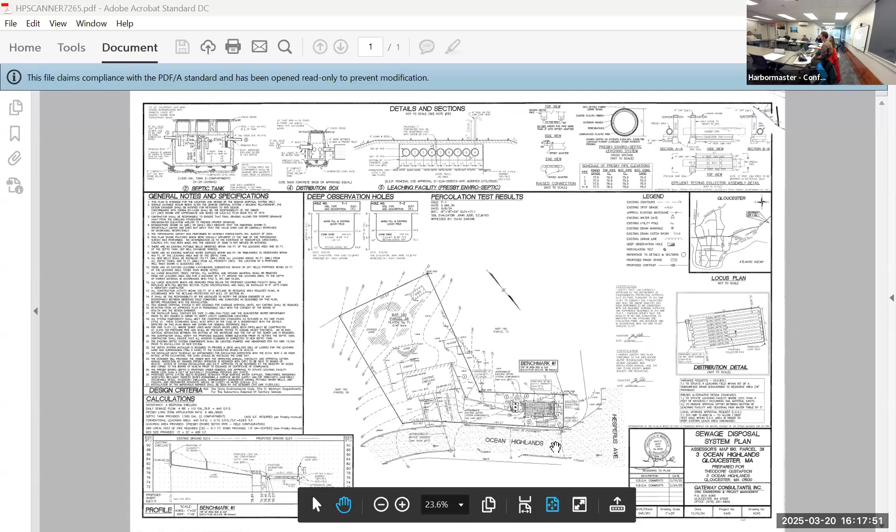That's it. Okay, we'll move on to the first item on the agenda, which is 3 Ocean Highlands relief requests for a septic repair. Tyler, feel free to take it away. All right, my name is Tyler Judd. I'm an engineer with Gateway Consultants representing this project at 3 Ocean Highlands. It's my understanding that John presented this project a couple weeks ago to you, and I believe you're all familiar with the proposed system already.

So it's my understanding that you guys wanted us to add a variance for the drain that's 18 feet away from the proposed field, which we've added to this revised plan here, and updated the variance form and notified abutters. So those are the only changes that we've made since the last meeting. So yeah, that's a pretty brief summary, but if you have any questions, please ask.

All right, and then just to summarize, just for the record, for 3 Ocean Highlands. They're asking for 1 Gloucester variance to a subsurface drain, where they're 18 feet away when they're supposed to be 50 feet away. They've provided an impermeable barrier around the system to make sure that the groundwater will be directed downward and not laterally. So in the event of a breakout, there should not be lateral movement of effluent towards that drain.

They are also asking for 2 alternative design standards with their Presby system. The first one is to reduce the depth of groundwater from 4 feet to 2 feet. That allows for a gravity system in this case, and also helps with grading on the site. And the system is approved for that. The other alternative design standard is that they're asking for relief for 4 feet of naturally occurring soil. They provided 34 inches of soil. So the system is approved for that reduction.

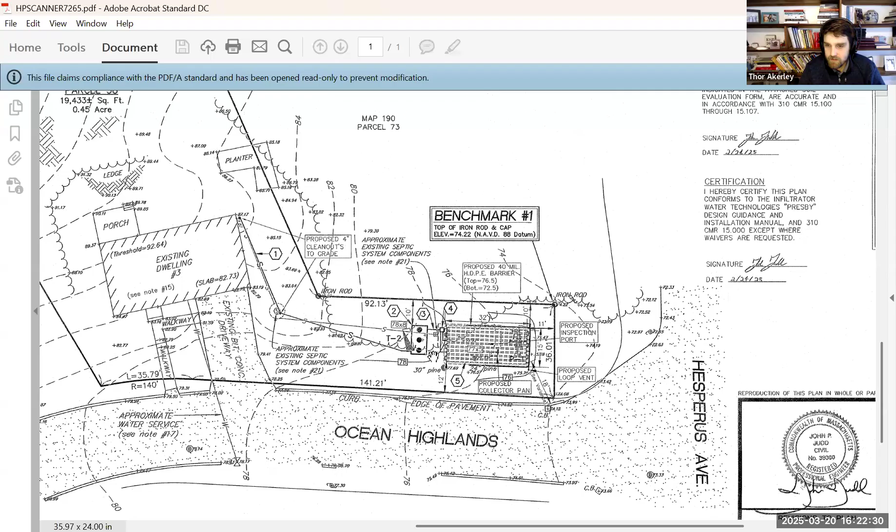Thanks. Okay, and then next up we have 35 Presson Point Road. Again, relief requests from designer John Judd from Gateway Consultants. Tyler, feel free to take this one away. Good, 1 second. All right, hello everyone. I can bring it up for you too, but you can start. Sure. Tyler Judd, engineer with Gateway Consultants, representing this project here at 35 Presson Point.

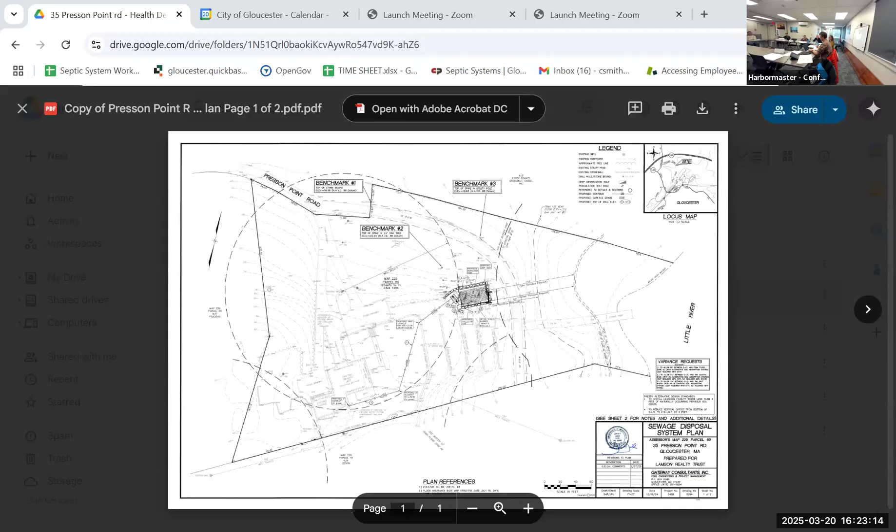So the existing system, I'll wait for Cody to pull up the plan. So the existing system is directly behind the existing dwelling. Yeah, if you want to zoom in, right over there is the existing system. It's about 10-15 feet away from the existing house, if that. And the owner would like to put in a new system that meets all Title V standards, well, most Title V standards, except for the alternative design standards that we're asking for.

Due to all the setbacks from the well, from the elevation 13 FEMA flood zone and the coastal bank, we were limited to a small area to situate a leaching field. And when we were digging in that area, we weren't able to get the 4 feet. We could only get to about 2 feet plus, and so that's why we have to request these alternative design standards with the Presby system. It's a gravity system that feeds into a D-box that goes directly into the Presby system that you see on the plan.

So yeah, we're asking for a few variances to allow the soil absorption system 65 feet away from the FEMA flood zone, to allow 112 feet between the soil absorption system and the coastal bank, and to allow 114 feet between the leaching field and the salt marsh. Gloucester requires 200 feet, where Title V requires only 100 for these areas, so those are our variance requests.

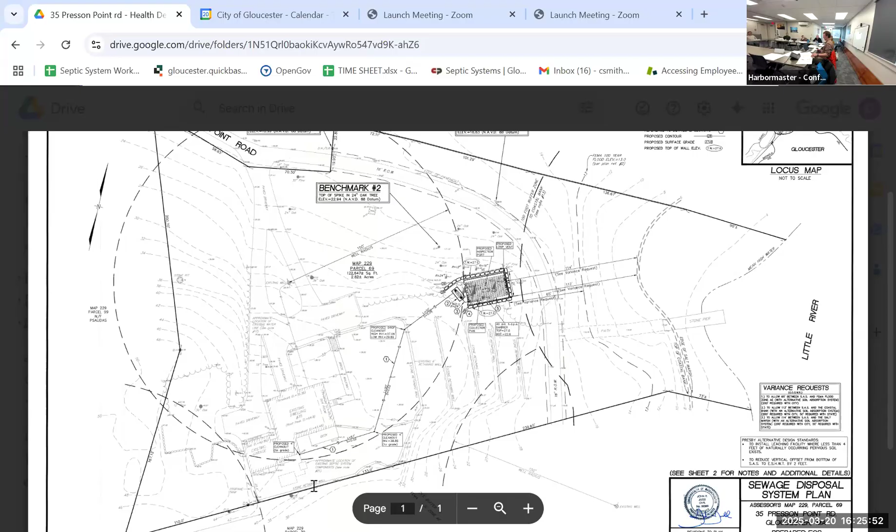And so I'll just kind of fill back in. So I think Tyler covered the 3 variances that he's asking for and the 2 alternative design standards. A question that I didn't ask that came up the other day is, I'm not quite sure, and maybe Tyler can elaborate after I'm done, why we didn't necessarily propose putting the system kind of at the top of the hill. I think initially when we were out there, it might have been talked about just the constructability basically being up in that corner, but I think it'd be good to elaborate on why you positioned the system there as opposed to the other spot potentially.

The system is approved for both alternative design standards. They are providing a pan lysimeter for testing on the first leg of the system that will require basically quarterly testing for the system to make sure that it's working. I know sometimes the board doesn't like patented sand filters as close to a wetland area or our coastal resource areas. They are approved under the same stringent protocols as the secondary treatment units, although they haven't necessarily been tested as long.

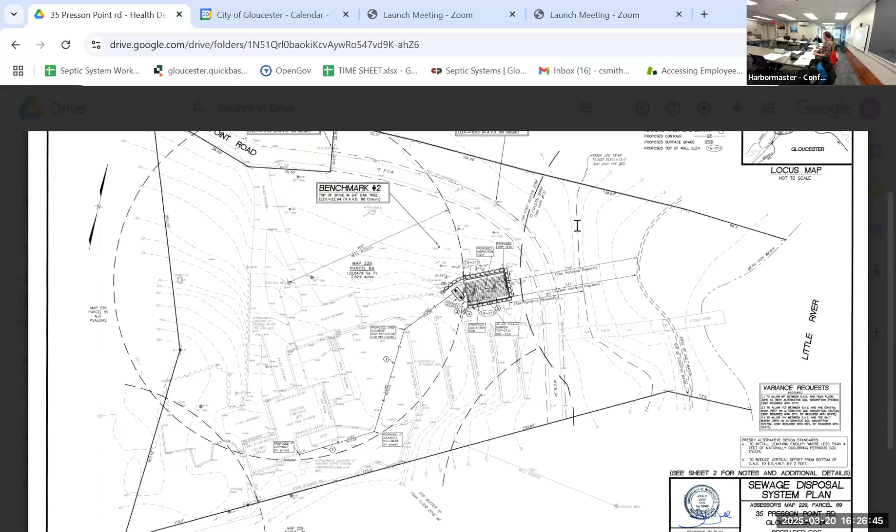In regards to the flood zone, it is a FEMA flood zone of 13. And so if we look at the vertical component here, the top of the system is at 27, so it's well out of the flood zone itself. So it does have good vertical relief from the flood zone. And from the salt marsh and such, they are kind of limited basically to either constructing in that far back corner, or in this kind of location here, unless they do a well setback.

They do have an impermeable barrier where there's limited soils, so the liquid will be directed downward. You're looking at about 5 feet of sand on the far end of the field. So even though they're looking for a reduction to 2 feet, they'll have plenty of sand above it. So that'll kind of aid in the filtration effect. Sand isn't a great treatment media, but it is a good clarifier.

The soils are loamy sand, I believe, or sandy loam. In either case, both sandy loams and loamy sands are better filtrators of nitrogen and BOD and TSS as it goes through, because of that silt content being electrically charged. So if this system was out on a sandy beach, I wouldn't necessarily recommend it in this scenario. It's my opinion that the system meets the requirements set forth by the state. And yeah, so my only question to Tyler is what the reasoning was for not putting it up in the original location.

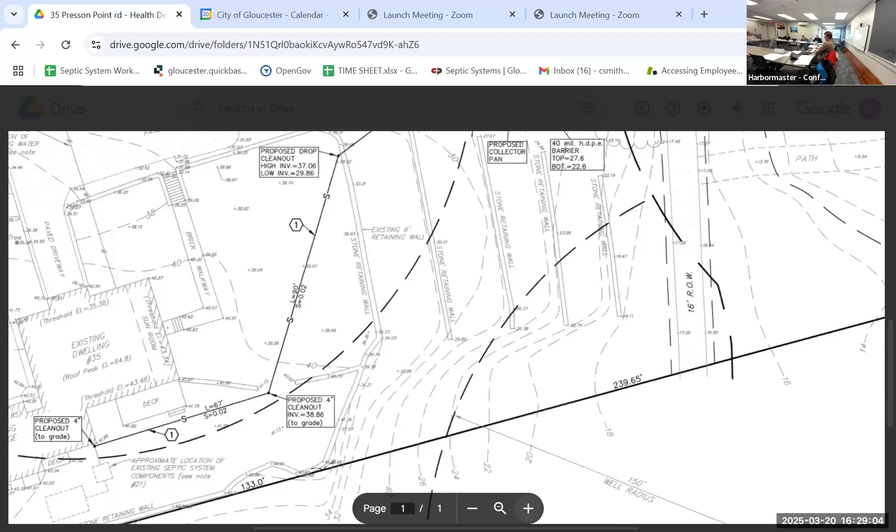It's all ledge and fill. Where the existing system is? Yeah, that whole area was kind of raised up. Okay. So if we dug over there, I know for a fact we'd get ledge less than 2 feet away. I could show you on the screen, but yeah. Beyond that retaining wall, it's all ledge, and then up there, it's gonna be. This whole area was terraced at one point. Yeah, so that's why we didn't even bother looking over there, because it's not good soil and it's ledge.

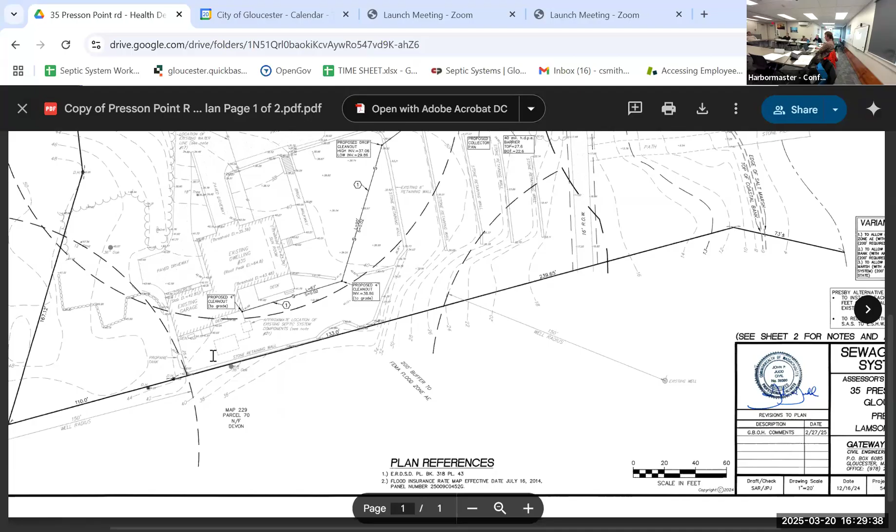You can see the ledge if you go out there, very, very shallow. Yeah, I know out here, this is all ledge on the backside of the house, from walking on the site. And that wall kind of follows the profile of the ledge over on that backside. And then we'd probably have to ask for relief too. You'd probably have to ask for relief to property lines and to the building itself. Right. Board members?

You answered a lot of my questions, thank you, Cody. The area is terraced, as you said. And I'm wondering, one of the reliefs you're asking for is a reduction, because you don't want to have such a large retaining wall. And I'm wondering, because the area is kind of terraced, why that wouldn't just fit in aesthetically with the other terraces and things like that.

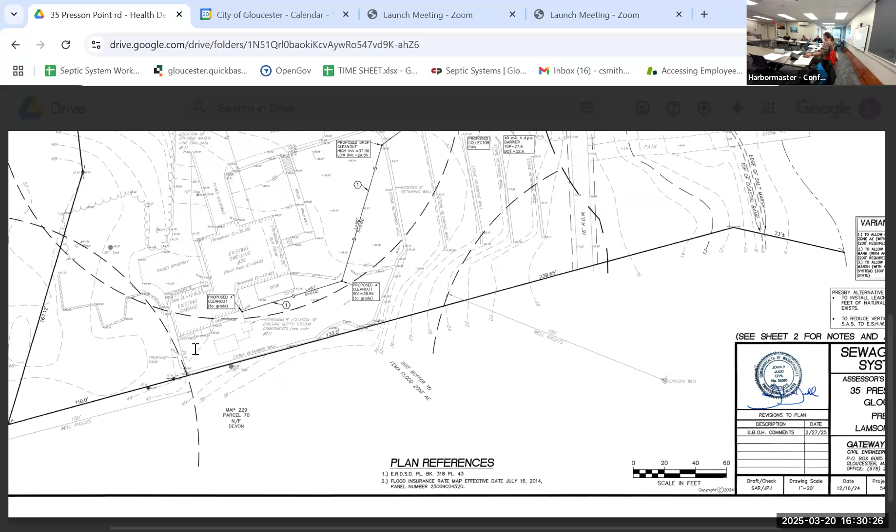Nobody wants a system that looks like the state fish pier. But in a site like this, it looks like it could be terraced in with the existing terraces. So I'm wondering why you couldn't have a retaining wall there that sort of ties into the existing terraces, and it wouldn't stick out like the state fish pier, and you wouldn't have to have so much of a reduction.

So much of a reduction in... Well, you want a reduction to seasonal high groundwater because it's gonna be almost a 5-foot wall. Yeah, right now it's a 5-foot wall on this side. Right. So I think that's the reason for the reduction, because if it wasn't a reduction, then it would have to be even higher. Well, I wasn't on site, but my question is, the terraces, could that be blended in with the existing terraces so that it doesn't look like the state fish pier, if you didn't have that reduction?

I guess I don't know. I know that it is a high wall, so being out on site, this corner, which is the high point for it, would then have to be 2 feet higher. Right. So instead of a 5-foot wall, you'd be looking at a 7-foot wall, so it might blend in better on this side. Right. But I think on this side, you'd be creating potentially a hazard or have to put a fence in if you have a wall that high. Or you could walk it around. I'm just saying. The property's terraced anyway.

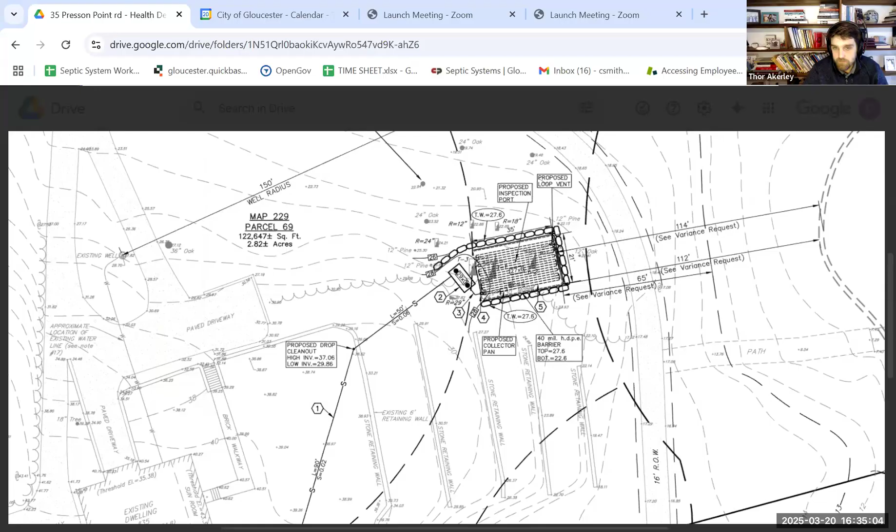So I do think we should take that 24-inch water table because it's running on top of ledge, which is probably going to be consistent throughout the system. Maybe we could take that from 26 and a half down 24 inches and pick the system up a little bit. I think that should happen anyway, because I think the elevation used for groundwater is a little bit lower than it should be. It should be 24 and a half, not 25, in my opinion.

I don't know if that would appease Dave's concerns. But also I hear what you're saying too, Dave. Makes some sense. Does that make sense? Yeah. So Thor, you're saying the seasonal high groundwater they used was off of a different test pit, was incorrect? No, I'm saying on sheet 2 of the design plan, they called out both test pits at elevation 25, which is fine, but the high point of the system is 26 and a half.

Sometimes it's appropriate to assume the groundwater is that elevation, but in this case, I think it's going to be pretty consistent throughout the whole system because it's on top of ledge. So you should assume that the groundwater is 24 inches below the highest existing grade of the system, which in this case is 26 and a half. Not 25. Gotcha. That upper corner of the system is probably existing elevation about 26 and a half. Okay, I see what you're saying. And sometimes it is appropriate to do what you did. I just think in this case, it doesn't make sense to me.

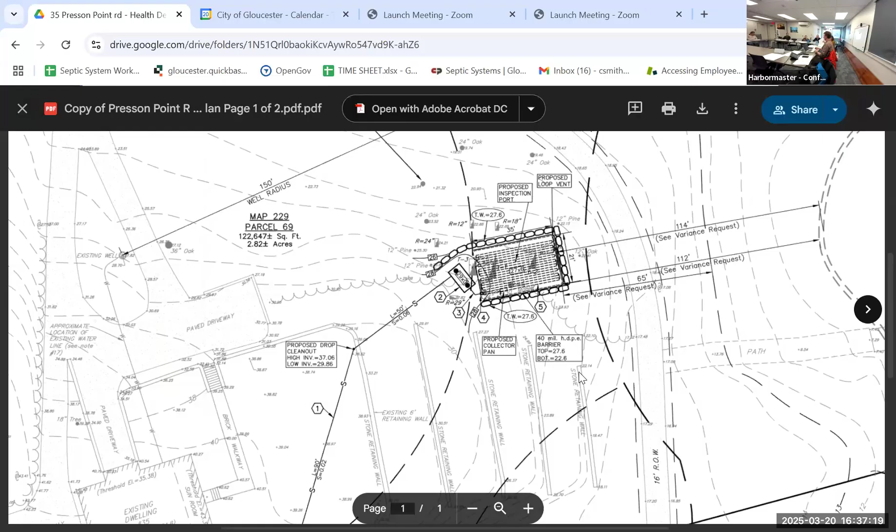But more Title V sand that could be brought in, you're getting more treatment, and it's in a relatively sensitive environmental area. And I'm wondering if it could be, just for aesthetic reasons, blended in somehow, even if it's stepped down. It's always important from my viewpoint, if it looks good afterwards, neighbors are more apt to have their system done, particularly if it adds equity to the property, rather than if it looks like an eyesore. So I think here, with a view of Little River, it actually could add equity to the property if done right, landscaped right.

So yeah, I guess Thor, do you want to then move to have them come back with a new plan? Or, Tyler, what do you think? Do we want to see it again? I think maybe it makes sense to, but I'd also probably be comfortable saying what we want here, and Cody can review it administratively. But if you want to come back and talk to them about revising the layout of some of that backyard, then maybe we should talk about it again. But if not, then yeah.

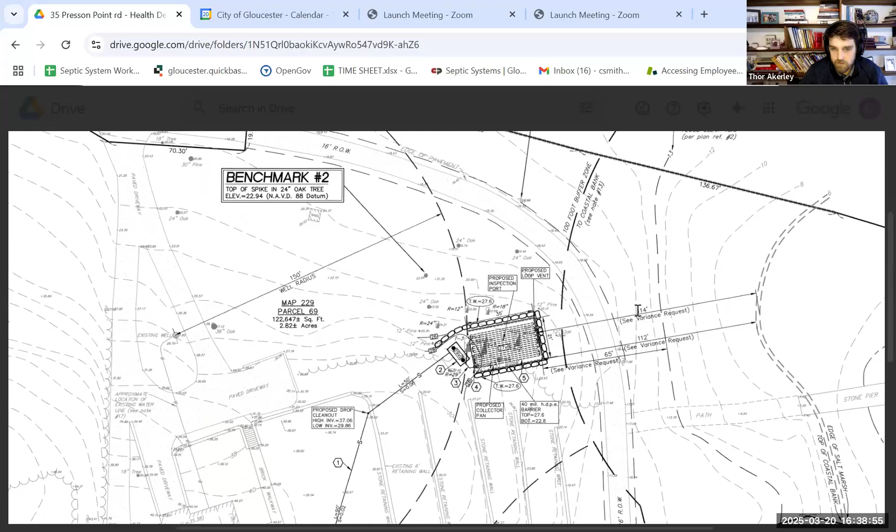It's your call. We can raise the field a foot to match that 26 contour, or that 26 spot grade up by the D box. So if that would appease you guys, we can definitely revise the plan. It's up to you if you want to approve it subject to us changing it, or if you want us to come back. But we can do that.

I think if the board wants to vote on the approval of the variances, the field isn't going to shift, it's just vertically going to go up, which has an effect on the alternative design standard. And it's less stringent, so my recommendation would be that they submit a new plan and maybe I just confer with Thor before an approval letter goes out that the seasonal high groundwater has been adjusted appropriately. I think that's safer because somebody may say it wasn't advertised properly because the reductions are a little bit different.

So you think it should come back then? Yeah. Okay, that's the safer way to do it. We'll bring it back. Let's just do that. Continue to the next subcommittee meeting. Tyler, is that okay? Yeah.

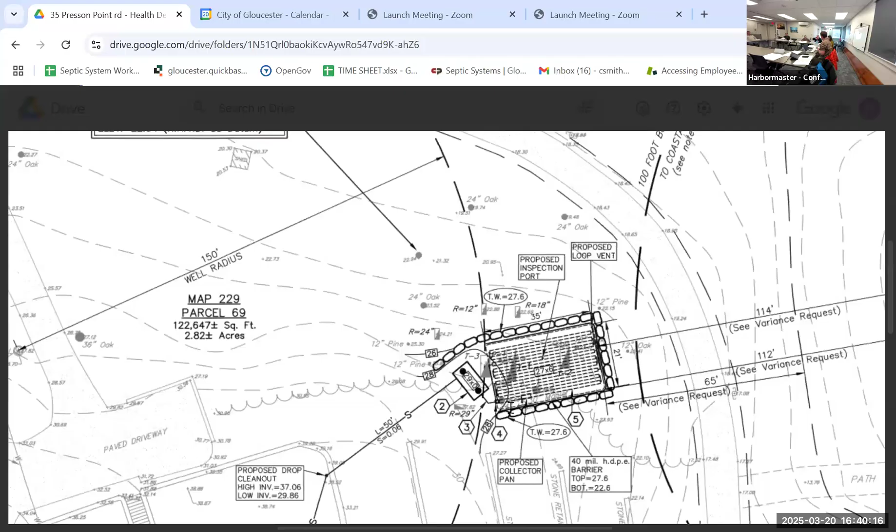Next up is 10 Lawrence Mountain Road, relief request from designer Daniel Johnson, Domestic Septic Design Inc. Feel free to present the project, Dan. Hi, Dan Johnson of Domestic Septic Design. I was hired by the homeowner for 10 Lawrence Mountain Road to upgrade their failed system.

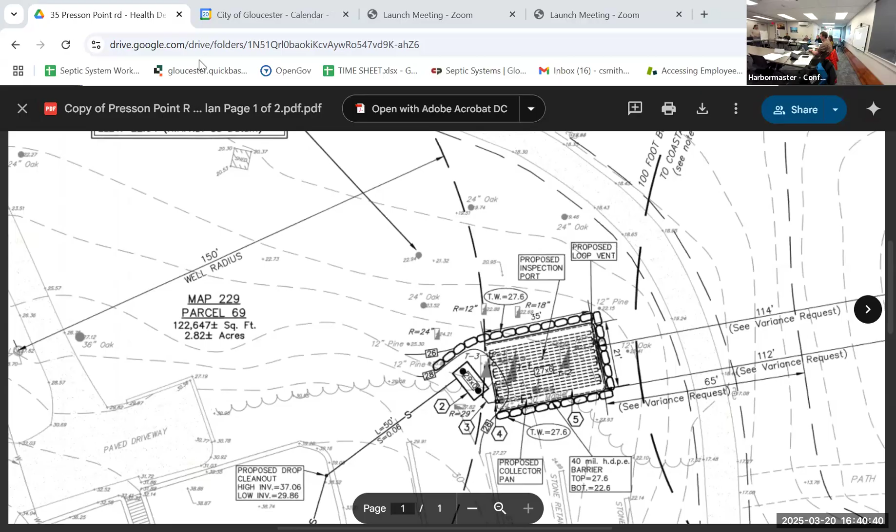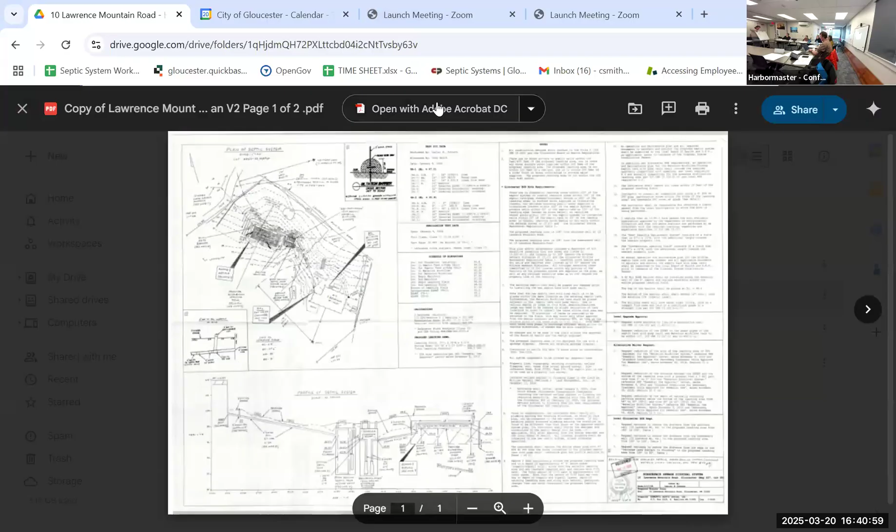Once you get to the site, you can see what the site restrictions are right off the bat. They have two wells, one well on the property that services the house with a 100-foot radius, not the 150 required by Gloucester. And then the neighbor across the street has a well, and here's their 100-foot radius, not the 150 required by Gloucester. And we have the isolated land subject to flooding on the other side, which is on the city of Gloucester property.

The site undulates up. When you get there, you can see why the only place they put the original system, which is failing now, is right here. In fact, portions of the pipe, you can see it's almost at grade. It's so shallow even in these lower areas there.

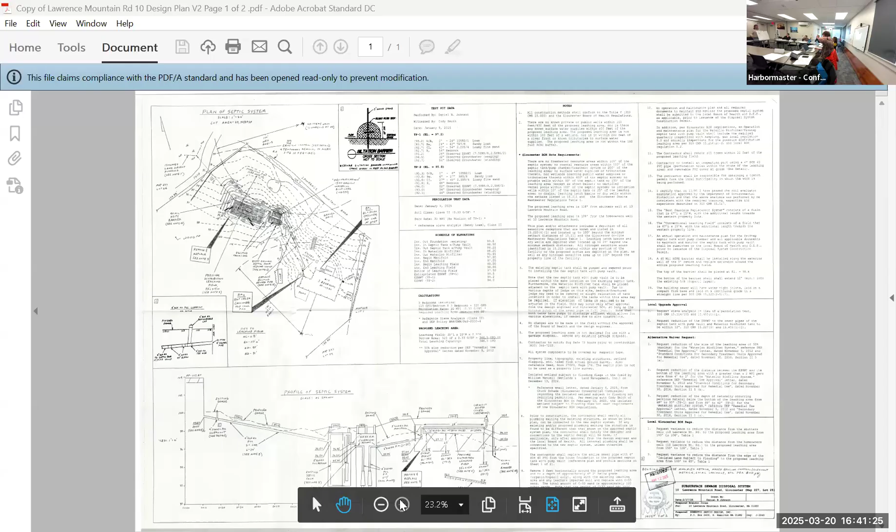So Thor and I were out there doing soil tests. Me and you. Thor, sorry, Thor. Old habits hard to die.

Cody and I were out doing soil tests. And we found decent soil, good loamy, fine sandy loam subsoil, a good loamy fine sand parent material, but insufficient. We didn't get our 48 inches of it. The soil was very wet, so we couldn't even run a perc test. So we took a sieve analysis from the least restricted soil, which was the Bw, and it came back as a class 2. So we designed it for 30 minutes per inch, just given the regulations for percolation of the DEP.

And as a result of that, and because of the environmental restrictions of these two wells, I met with Cody. I did a design before I even finalized the plan and said, I was gonna do a Waterloo, should we do denitrification or not? And he defaulted to the denitrification because of the environmentally sensitive area of the two private wells that are within 150 feet of the leaching area, but still greater than 100 feet.

So as a result, we're gonna replace the entire new line. Since we're out here, we're gonna put a whole new Schedule 40 PVC pipe and a 1,500 gallon Waterloo biofilter, model UG 550, and a 2,000 gallon septic tank with pump vault to treat the septic effluent for the new proposed 3-bedroom septic system.

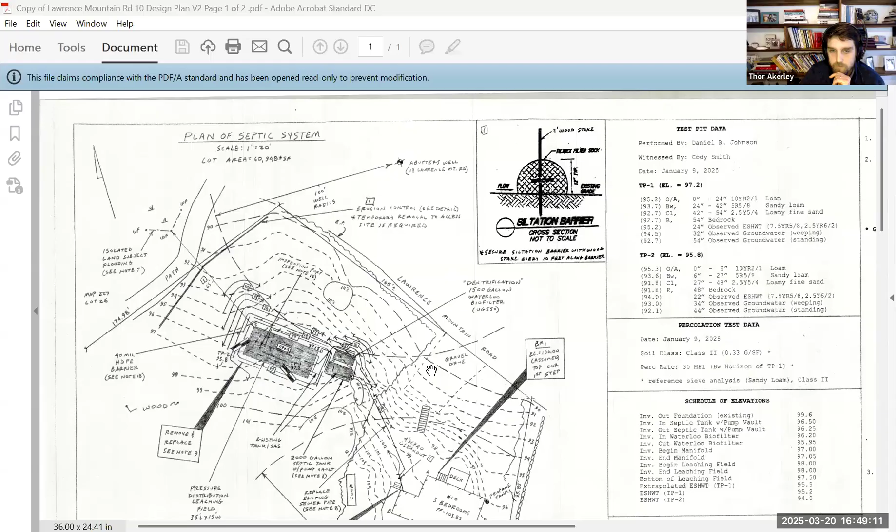Not seeing any, I would motion to approve this plan, with the variances enumerated as so. Second. Any further discussion? Hearing none. Thor, yes? Eric, yes. Marco, yes. Okay. Thanks, Dan. Thank you. Take care, Thor. Appreciate it. Good job.

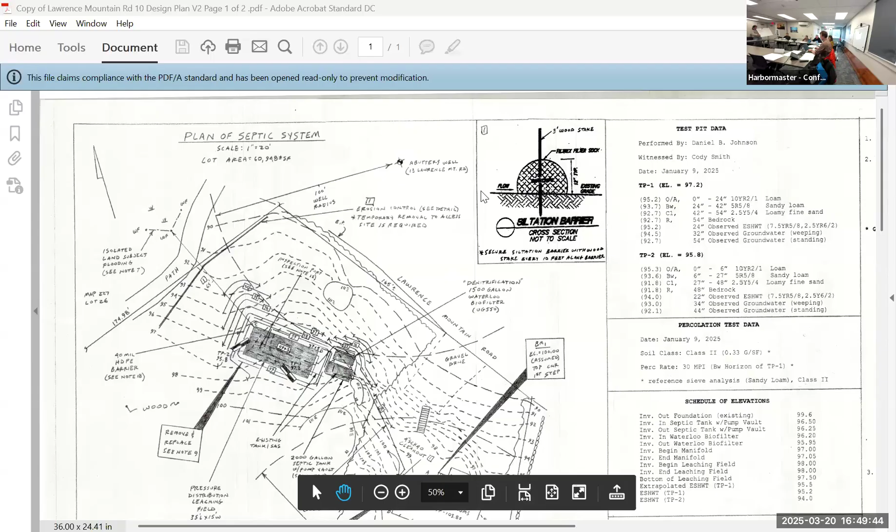Okay, next we have 4 and 6 Dublin Lane, relief request from designer John Judd, Gateway Consultants. Tyler, feel free to take this one away. Great. Hello again, everyone. Tyler Judd, engineer with Gateway Consultants. I'll be representing this project here at 4 and 6 Dublin Lane. So Cody and I and John went out here and we got pretty good depths in soil. Water table was pretty deep down, so it wasn't too big of an issue. We are proposing a standard system with a pump that will be pressure distributed to a pipe and stone field.

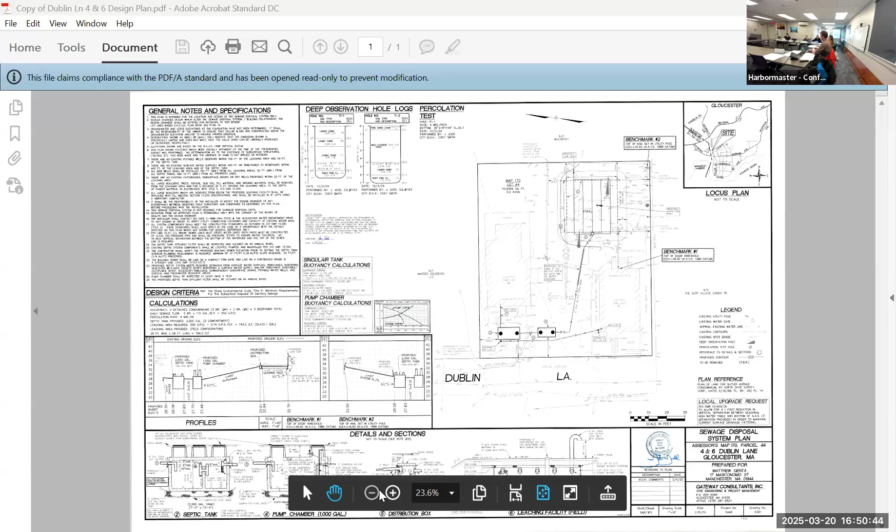We're asking for a local upgrade request to reduce the offset to water table from the bottom of field by 1 foot. This is because we don't want to have a big mounded system with water going back into the house and into both houses. Yeah, that's a pretty brief rundown of the project, but that's the only relief that we're requesting on this. It meets Title V and local regulations in every other regard. So yeah, happy to answer any questions you may have.

Yeah, so just to reiterate, this is a condo complex, so it's a shared system. There's 2 apartments, if you will, in number 4, and number 6 is a 2-bedroom unit. We didn't do walkthroughs, but per the assessors, it's not an increase in design. The septic system for unit 4 is shown. Septic system for number 6, we have 2 pits there shown. We're not too sure how the sewer lines necessarily get to those pits, but they'll be abandoned properly and the notes are there for that. So it's a big improvement on what is there.

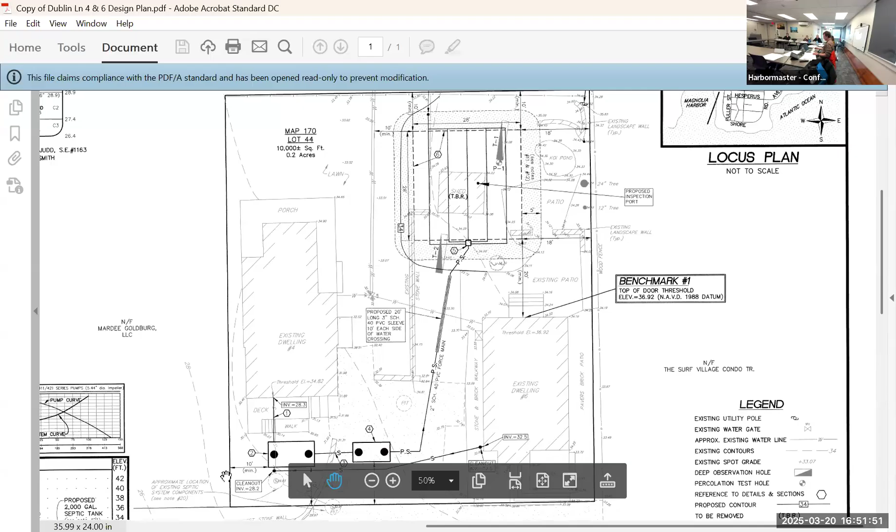It is just a pump to a D-box conventional system. The LUA does allow you to have a 1 foot groundwater reduction without providing an STU. The soils out there were, from what I found so far, typical really coarse sands overlying basically a lower siltier layer that's down deeper. So good soils on the site. I think it does make sense, doing the walk around back here, to ask for the reduction. It kind of makes the backyard a lot more of a valuable space.

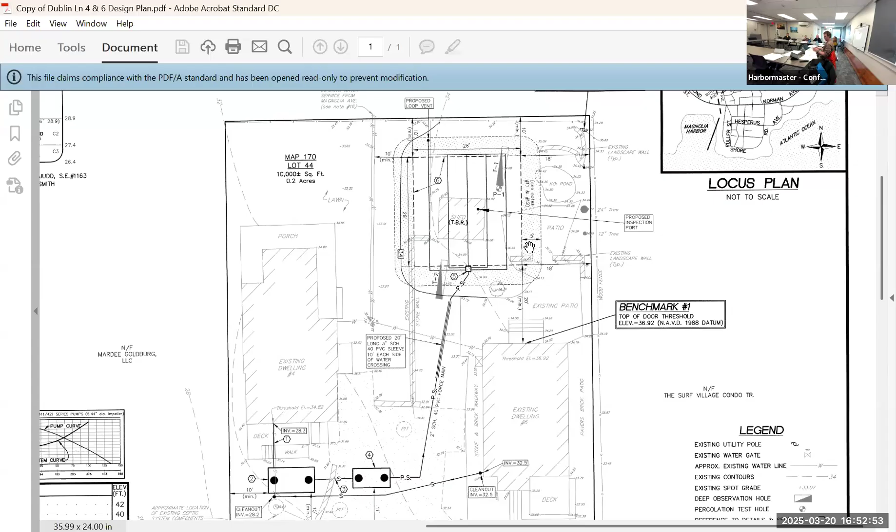It does have to cross the water line in one location. That location will be sleeved on both sides of it in the event that an 18-inch separation can't happen. Yeah, so there's no variances to really vote on, but the board just needs to make, I guess, still a motion basically to vote on the acceptance of the LUA. Or you? I don't have any questions. I think this is appropriate. Dave and anyone else?

When I looked at the assessors, number 4 said that it had 1 bedroom rather than 3 bedrooms. So for the assessors, there's 2 field cards for 4. One is for the 1 bedroom and one is for the 2 bedroom. For number 4, under the assessors, there were 2 field cards. Okay. I think it's unit 1 and unit 2. I found it really confusing when I first looked. So there are the field cards confirming that, and the owner was out there at the time of number 4, and he did confirm that was the amount of bedrooms for that building.

And the only other suggestion is, regardless if you have the 18 inches of separation, to sleeve the water line anyway too. Yeah, regardless, you're saying. Eric or Marco? No questions. I don't think we need a motion, but it sounds like we're comfortable with it. Okay. All right. That works. Yeah, as long as the board's comfortable, then I can issue the letter.

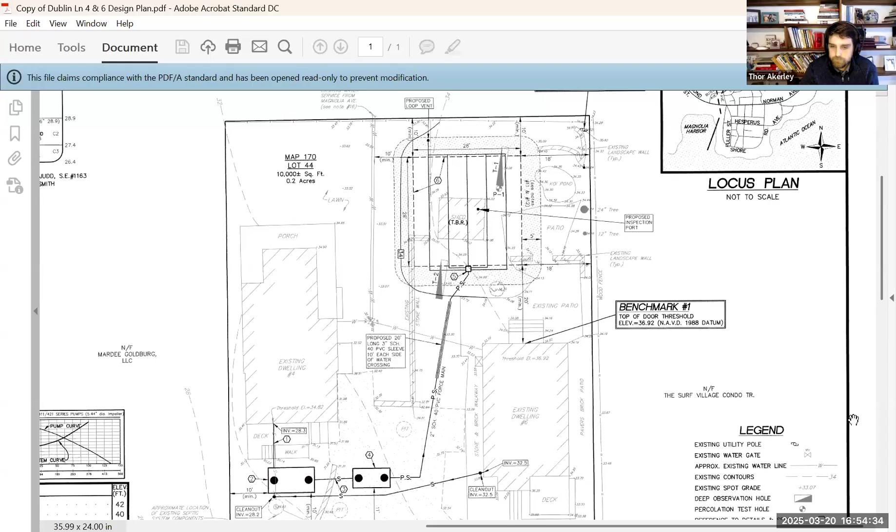Right. So 24 Brooks Road is up. Oh, sorry, Thor. No, that's fine. 24 Brooks Road, relief request from designer John Judd, Gateway Consultants. Tyler, again. One second, you guys are moving faster than me. All right, last one. Hello everyone, Tyler Judd, engineer with Gateway Consultants, representing this project here at 24 Brooks Road.

So this one, the existing system is basically just a pit that's about 5-10 feet off the foundation, and this is a tricky site because there's not a lot of area that we could find for soils, as you can see. Oh, sorry. Sorry, I'm working on it. I wanted to be able to bring up both. It's just taking me a second. Yeah, I'll wait.

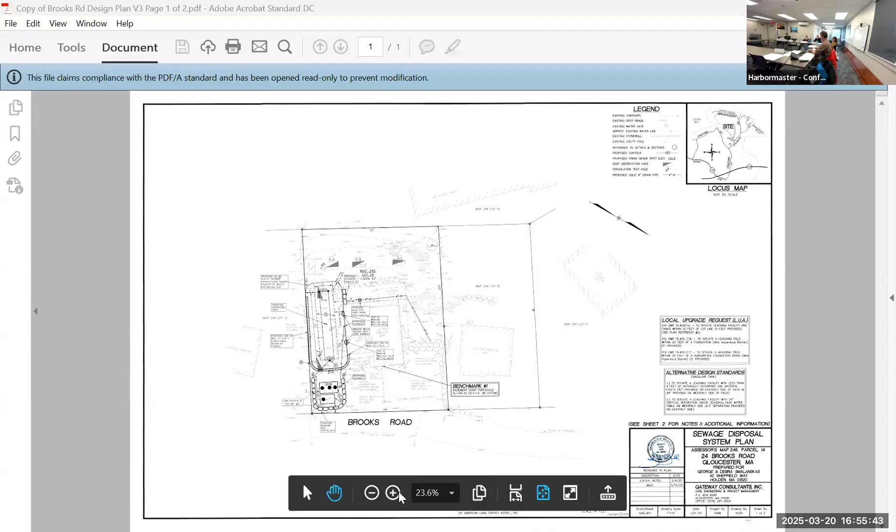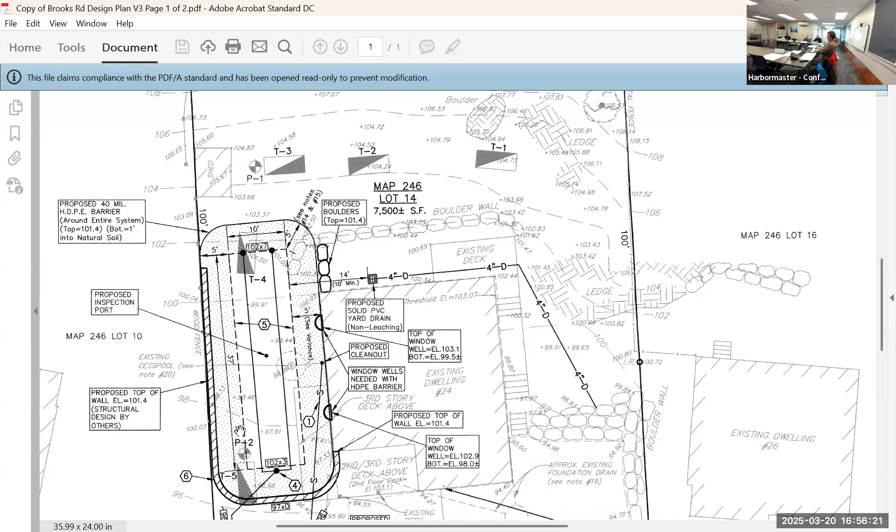So this is only a 75 by 100 foot lot. If you scroll up a little bit, Cody, you could see the test pits that we did up there, and we were getting very shallow depths for soil. We started in the top right and then worked our way back down, kind of in a line. The 2 test pits that you see on the left side of the house were the only ones where we could actually get 24 or more inches of soil. This is the area where the existing system is, and this was kind of the only area that we could work with to put a system in.

We're proposing to add a single tank, go into a pump chamber, and then pressure distribute it up that wall that you can see there into the manifolds. So that's pretty much the best way that we could situate this field, and I'd be happy to answer any questions you may have. And then I'll just do my typical fill in. So Tyler kind of gave you an overview. We dug the holes out here.

There is a large ledge or boulder on this side. They did have it come out and split the boulder, and then we dug down and there is dirt underneath that boulder. So it is confirmed that it is a large boulder. We dug this test pit about 2 months after we dug these additionals, because the homeowner really was trying to find a solution that didn't require a tight tank. Because many of the houses up on Brooks Road, it's kind of a split 50-50. Some houses have had enough soil, some houses haven't.

So there is about 24 inches of soil up here. As we come down the hill, this pit here had more soil. It had about 42 inches in it total. So we started to get better depth on this side of the site.

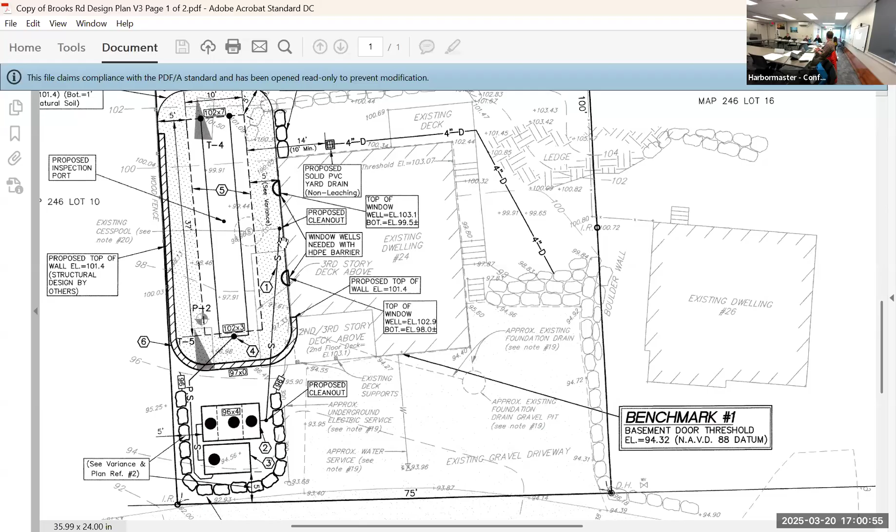So they kind of worked with some of our concerns. They also slid the tanks down, so instead of originally a 10-foot setback, now we have a 5-foot setback to the wall. That's to help with that bathtub scenario, or just help with moving liquid off of that area, because the hydraulic gradient is definitely along the direction of the field itself. Both those tanks will most likely have to be blasted in order to be installed.

Just to go really quickly through their LUAs, they do have property line setbacks for all the tanks and the leach fields to this abutter over here, as well as the main road. This abutter on this side, their septic system is over 10 feet away. It's kind of up in this corner, a little bit further away than that, so there's adequate separation between the beds as far as Title V is concerned.

The other LUA, like we talked about, is to go to 5 feet away from a foundation wall, where 20 feet is required, so it's quite a reduction. Although they are providing the impermeable membrane, and the foundation drain potentially is maybe actually an asset for providing better human health. I'm not quite sure what the basement is here. I know it is walk-in from street level, so it's 3-sided. So it may or may not have habitable space, but it seems like it's used.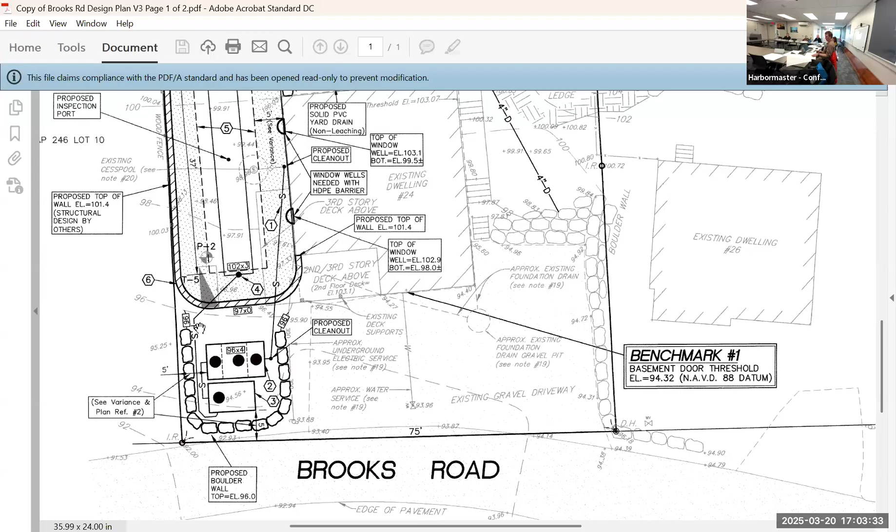So the reduction to groundwater being outside the setbacks is less of a potential hazard. And then there is a reduction from not having 4 feet of naturally occurring soil, 29 inches on one side and 49 inches on the other. I did want to just share with the board real quick before I hand it over for questions.

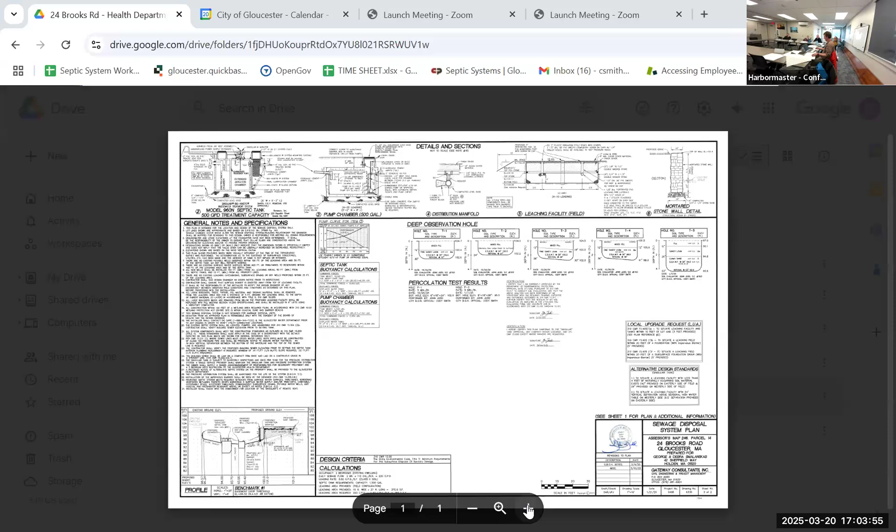Just this other one that shows the ledge profile, because I feel like it is a very important part of this plan. Yeah, sorry. Bear with me. But I did ask Tyler to add this.

So you can see here, on the ledge profile in this corner, that we do have 2 feet, 2.5 feet of soil underneath this foundation wall, with the wall itself. So things have shifted up. Yeah, so the ledge profile was provided at least to maybe alleviate some risk of that bathtub scenario, and George is on the line, so the homeowner's aware of that concern. Thanks, Cody.

Just a couple things. That's another tough one. I would say, as a condition of the approval, just make sure they pull their building permit for that wall, and that you get a chance to look at it, Cody, and that you're satisfied with the wall design. And it probably makes sense to have them stake the wall too, just to make sure they build it in the right location as part of the approval, and they can stake it when they stake the leaching field. Okay. I would recommend adding those as part of the approval.

And I think I remember 4 Hunter Road is on a well. I could be wrong, but I thought I remember it was. I don't know if that was checked or not, Tyler or Cody. We checked the well reports, the DEP ones, we didn't see it listed. In terms of checking every house in a 100-foot radius, we did not. So you didn't knock on doors, but you checked. Yeah, I didn't see it on MapGeo or the Mass DEP well database. Okay. I mean, you've done test pits out there, so it may have come up at other times. So is that something we should look into and confirm?

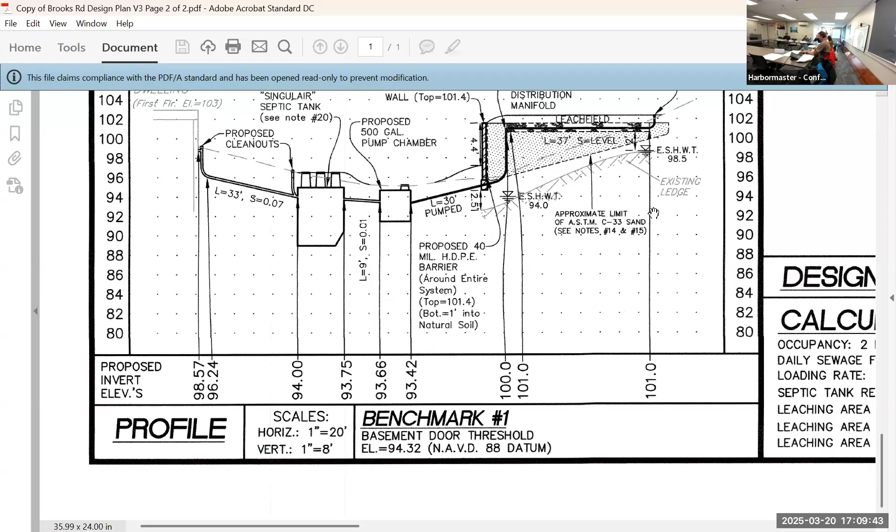It's back, just in time. There we go. We're back to the echo chamber. With the echo chamber, yeah.

Give me just a minute and I'll pull up the regs. So this is just a working session, basically, for the regs. Around the corner. Yeah, let's see. Does everyone have a copy? Not yet. Oh, no, I just picked this one up. No, everyone has a copy. Okay. I handed out copies. Just the big ones? Yep. Okay.

So our goal here is to come out with clarification and something we can work with. What you have in front of you, or what was sent out, is the open issues we have with the regulations. We sent it out to our designers, and they had a chance to read through it and give us feedback in a certain amount of time. With their feedback, if it was just that something was unclear, we might have cleared it up in the document. So some of those things have already been taken care of, or for some things we said this isn't important for the board, we've discussed it and we're not going to include it.

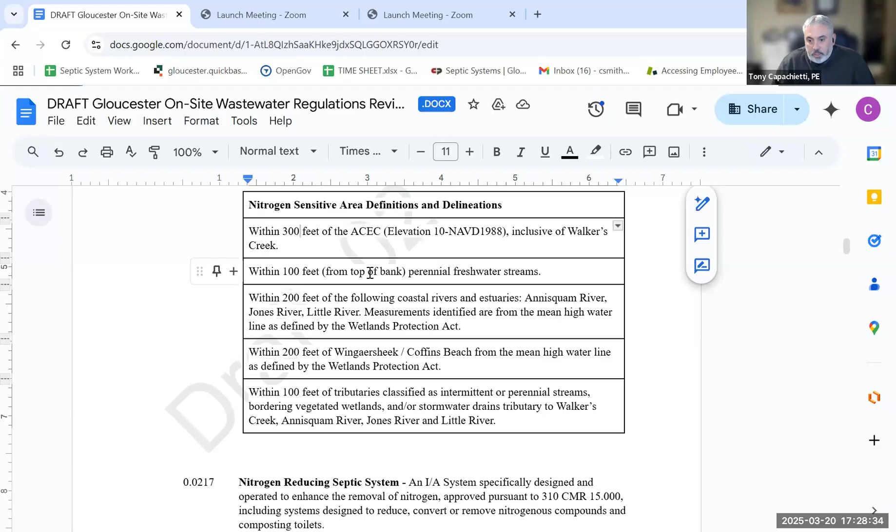The Gloucester Wetlands Ordinance defines a resource called the upland edge that's 100 feet away from the ACEC, and people miss that a lot. So it's 200 feet from that resource area that's the upland edge. So people who aren't familiar with Gloucester come in thinking it's 200 feet from the ACEC, when it's really 200 feet from that local resource area. It's a coastal resource area, which equates to 300.

Well, we've had that conversation here. I think we all agreed that the upland edge is not specifically defined as a coastal resource area. It is considered a resource area under the Gloucester Wetlands Ordinance, but it's not specified as coastal. But the ACEC is coastal, so we've had variances come before us where they're in that 300 feet from the ACEC, but the first 200 is where there's a prohibition on septic systems, because that's where the 200-foot coastal offset comes from. Correct me if I'm wrong, Dave or Cody.

No, you're right, and this is sort of merged together, the ConCom ordinance and... I'll read it. No component of any drainage system or septic system shall be installed within 100 feet of the upland edge that is within 200 feet of the ACEC. So this brings it into that. This covers that.

Has the commission historically required nitrogen sensitive or nitrogen removal technology between 200 and 300, Dave? No, it hasn't. But it will not allow a system to be within 200 feet of the ACEC. Right, 200 feet. But this is the 300. Within 200 feet of the ACEC, and it's at its discretion for the other 100. So what this does is keep it in line: if between 200 and 300 feet of the ACEC they do nitrogen sensitive, the ConCom theoretically shouldn't have any problem.

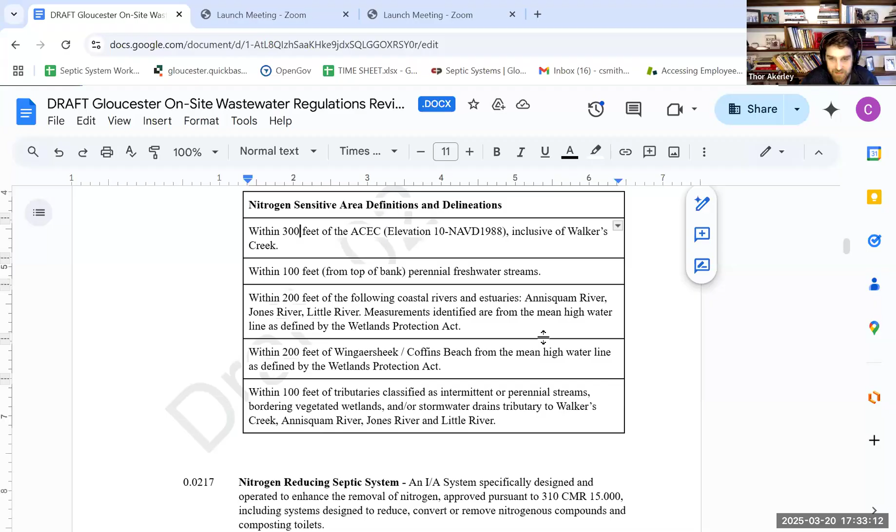Yeah, and that stream goes directly into... Yeah, so I'm working on that plan still, so.

Yep. All right, so everyone's in agreement that we're gonna keep the nitrogen regs in, we're gonna make that 100-foot change. We'll keep the ACEC requirement as it is. I mean, people won't be able to come forward and ask for variances for financial hardship. Sure. They're not allowed to do that, so for upgrades and repairs, like the system we saw for 10 Lawrence Road, it's a $10,000 increase to go to a nitrogen from a Waterloo system.

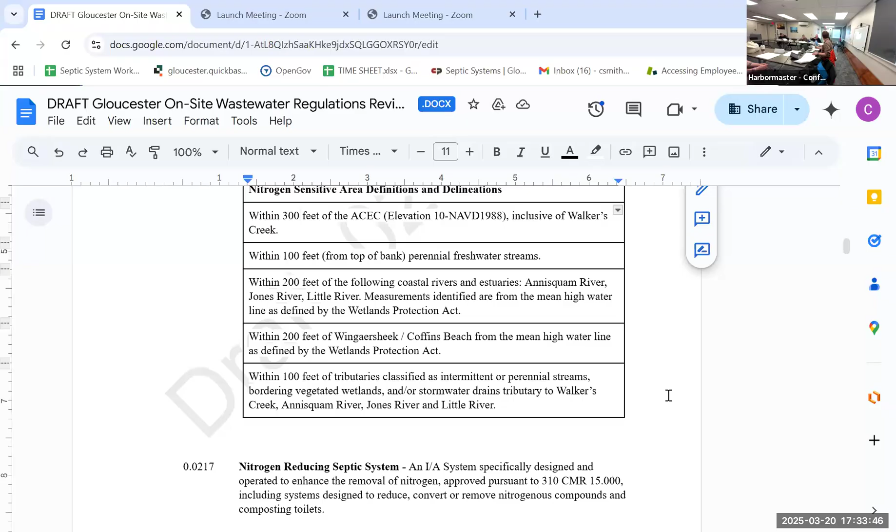So that's kind of what we're asking our residents to do, but we're also identifying that, I guess, as a hazardous area. I just want to say it's good to have a high standard and then be able to give people relief. And it's much harder to have a low standard and then require something on top of that.

Right. Could we add something in there that maybe, let's say someone's 290 feet, and the soil's good and it's all lawn and they have 4 feet to groundwater, to me that feels a little bit of overkill to have to do a Singulair or a FAST. Could we put in there somewhere to be able to have the discretion to grant relief to that, maybe? I don't know. Just a thought.

Within variances, every situation is different. There are complexities and nuances to every one. And so when that's presented for each property, that can be looked at because not all lots are created equal. Right. And I think with the way we're looking to move forward, especially if it was a new construction site or even an upgrade, you'd have to prove that it's manifestly unjust. You're right. And that's a very difficult argument to make.

So I think for new construction, at 290 feet, we have to feel good about making sure we're putting in a nitrogen system. We're not going to grant a variance for that. Could we add something like that relief for repairs may be considered without the request of a variance? I don't know, maybe it's, sorry. Go ahead. I'm not sure why that has to be manifestly unjust, all variances.

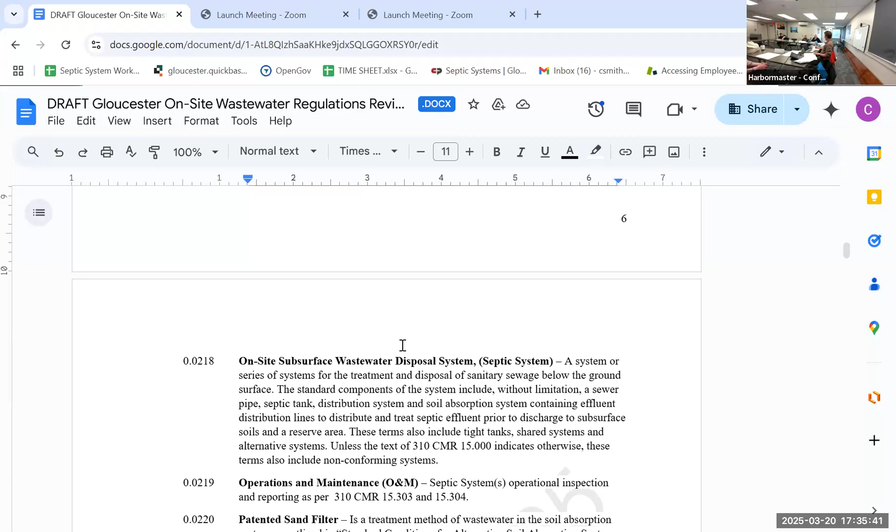That's all of our variances right now. If you ask for a variance, you have to make the argument for manifestly unjust. Right? So that's why I'm saying maybe that gives us an out to not have to meet that criteria. Which I think what you're thinking is maybe we can bring that up when we get a little further for repairs.

Title V is circular when it comes to manifestly unjust. And it creates problems that we're dealing with. And sometimes when people see black and white, I see 50 shades of gray. So. Right. I think what we're trying to do with the regulations is, there is no black and white in septic, but we can provide consistent and clear guidance. And the more shades of gray, the less consistent and clear guidance people can expect.

And so redoing the regs, hopefully a goal is to provide that consistency so that everyone knows, if I present this plan, obviously it's not going to work. Instead of somebody just saying, well, let's just see what happens. Which is kind of what people do now. I strongly believe that the board needs to have some latitude to be able to look at variances based on the specific situation on the lot, rather than black and white.

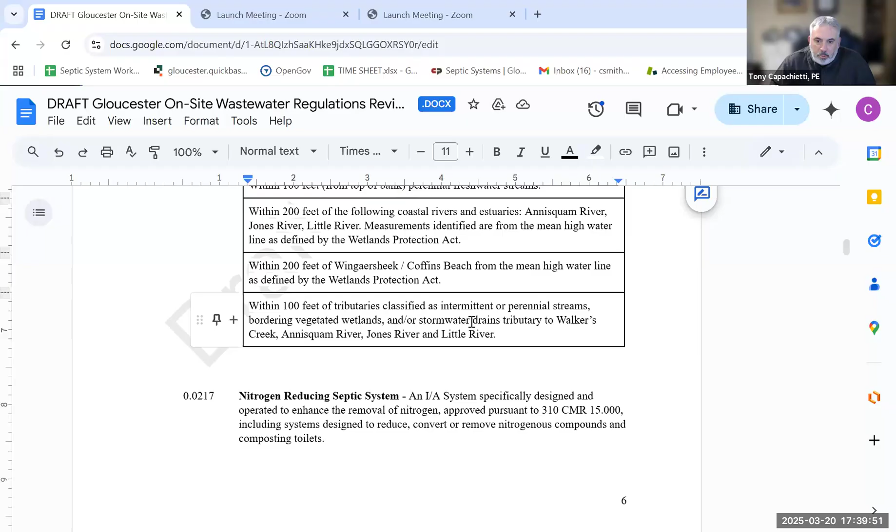Do you look at a different classification other than variance, maybe a waiver? That existing dwellings can seek a waiver to the nitrogen standards, provided they can exhibit that the environmental protection is equal based off of separation of groundwater or separation of resource area? If you were going to be doing that, I would use the word exemption. Waiver is used mostly for planning board. But I would use the word exemption.

And then I guess the other thing that we could potentially do, which is not really along what the board or the document is aligned with, is conservation basically does not specify what they want between 200 to 300 feet, they just say they want to have jurisdiction. So instead of having, I think it might create too much ambiguity. But do we want to pull this out of the nitrogen section and say that between 200 to 300 feet?

I don't know, do we want to have some type of discretion opposed to it just being in the nitrogen section, I guess? Cause conservation doesn't provide any feedback. Right, Dave, correct me, doesn't the document just say that they have jurisdiction between 200 to 300, but not that you have to do anything specifically? Well, yes and no. There are performance standards. You can't have any impact on the upland edge at all with drainage or anything that you do.

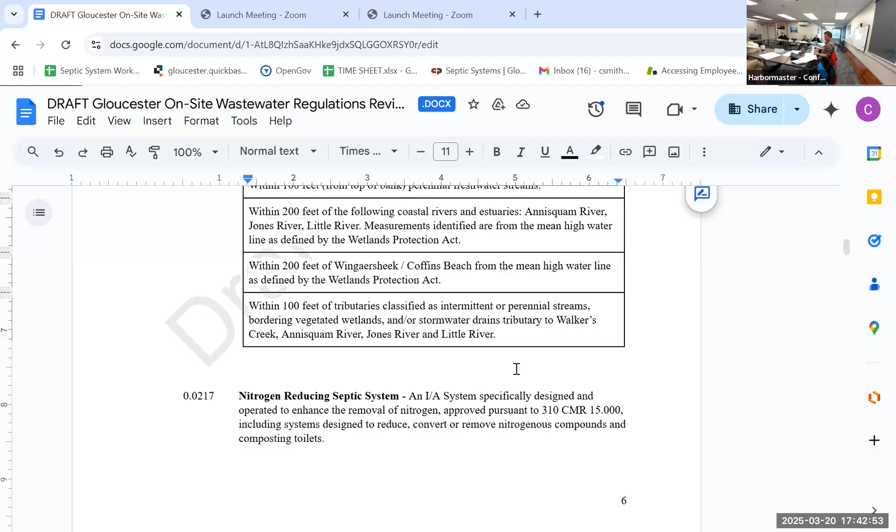So are we gonna clarify in this one item? The only edit is the change from 200 feet to 100 feet for a perennial stream. And then there's a side note to add an option to request an exemption between 200 and 300 feet for an existing dwelling. Is that what we're going for? Sounds right to me. Okay, and are we keeping this exemption language in this section, or does it belong in a more general section? We'll figure that out internally. Okay, so I've got those two edits. Got those edits? Yep. Awesome.

All right, so next up, this is another designer comment. Upgrade and repair shall only comply to Title V. New construction or increased flow shall meet Gloucester on-site wastewater regulations. The concern here was raising costs for existing homes. This topic didn't come up during discussion for our new regulations. I believe that even existing homes, it's kind of a bummer that they have to upgrade their systems, but these are environmentally sensitive areas and that's the whole point.

So I open it up to the board, but as the sanitarian, I would just say we have these regulations for a reason. And so some of these questions are just to prepare board members for questions that may be coming from the audience. And so this is one of them. Yeah. It can add a lot of cost to an existing home in Gloucester. But I think that's why we have our septic loan program and deferment program.

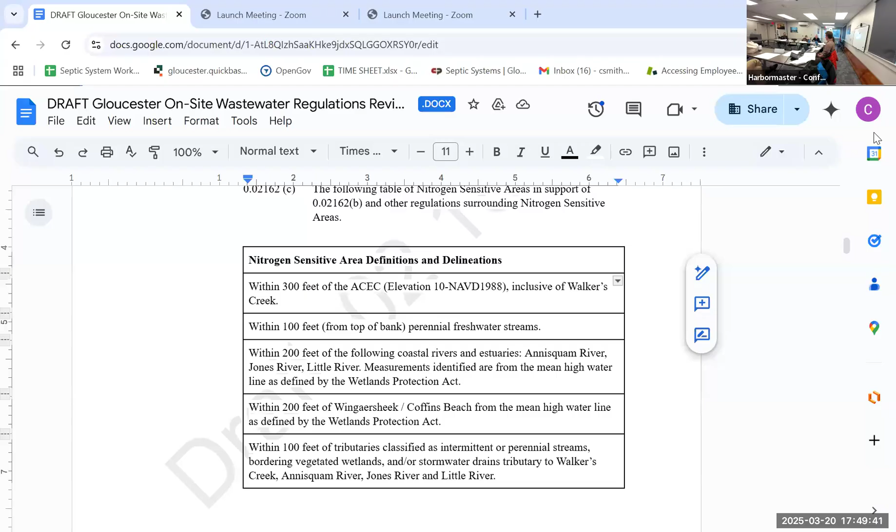We just talked about this a little bit, but I think there's some flaws in their argument. First of all, for a full variance, it's not just the Board of Health Septic Subcommittee, it's going in front of the full Board of Health. And they argue that you may not be qualified to make the assessment of manifestly unjust, but you are qualified to rely on the science of effluent treatment. The people on the board are thought to be qualified more so that they're open-minded, listen, and compare to the rules.

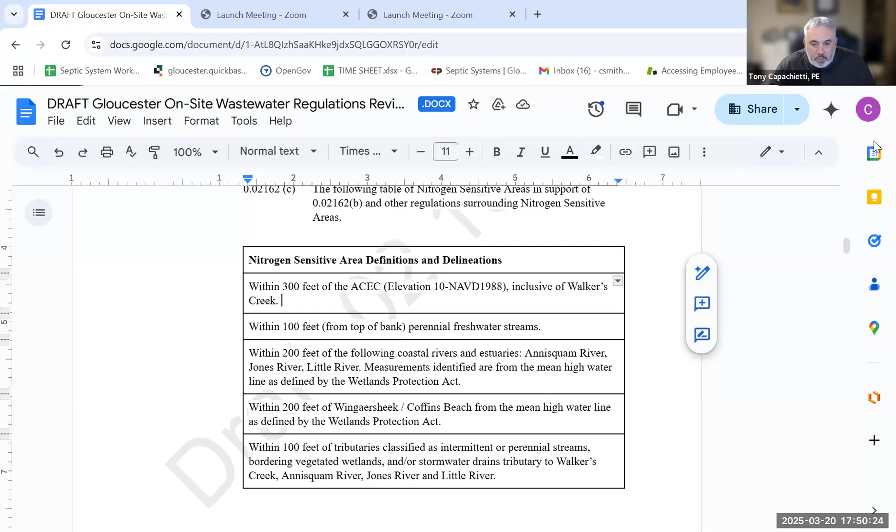I just think that that's the standard called out in Title V, and the further you get from that standard, the more trouble you can end up in, for lack of a better explanation.

Yeah. I agree with Tony. I note that in Title V, we use manifestly unjust, but it only uses substantially manifestly unjust when it comes to new construction. And in law, this was taken from case law, it's substantial loss of reasonable use of the property that was intended for. Otherwise, it's considered a taking. And then if you have a regulatory taking, you may be liable for buying that lot.

And Title V only has substantially manifestly unjust when it comes to new construction. It's just manifestly unjust for a bunch of other things. So there's more latitude for other variances than there is for new construction. Yes, there is more latitude if it's not new construction. Right, yeah.

And the problem is Title V uses new construction as a huge net, if you will, to cover even somebody adding flow to an existing system. And that existing system could be like a cesspool, and somebody could put in a new system and add 1 bedroom, nitrogen and everything else, and you would be improving public health, safety, and the environment. And is that better for health, in order to be able to do that? And I don't have the answer on how to write that up.

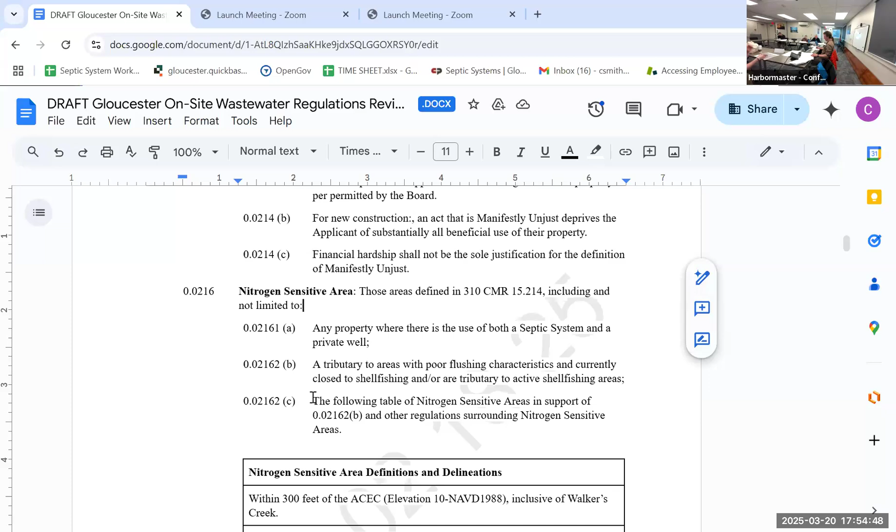Right, so I think we just need to, I don't think there is a way to change this definition. So someone just has to make their case, I guess, and the board has to be able to determine that. And I think that's where the 50 Shades of Grey come in. Yeah, I agree. So we do our best and sometimes it falls through. All right, so the next item, 0302. I don't think we can change the definition.

So this is a comment that this is a circular reference. So we added this in: all septic design plans with components of systems located within setbacks to resource areas and buffer zones shall be submitted to the Conservation Commission for review. Health Department approval of such a plan shall be contingent upon obtaining conservation approval. Now, this doesn't necessarily say that conservation has to approve first. Right. This just says that when we approve a plan, you still need to go to conservation to get approval.

I mean, it's already state law, but does it make sense to keep it in there? You're saying it's state law, Thor? Yep. Yeah, keep it, it's fine. Most consultants should know that, but it's fine. All right.

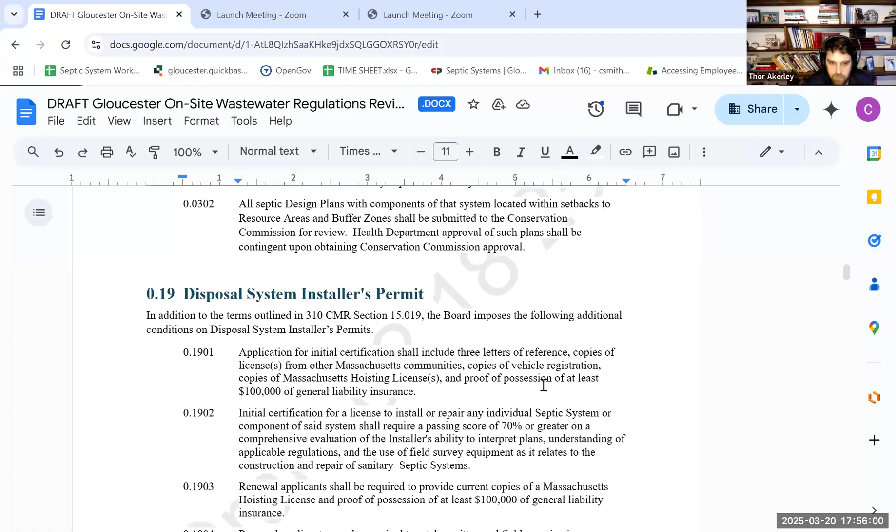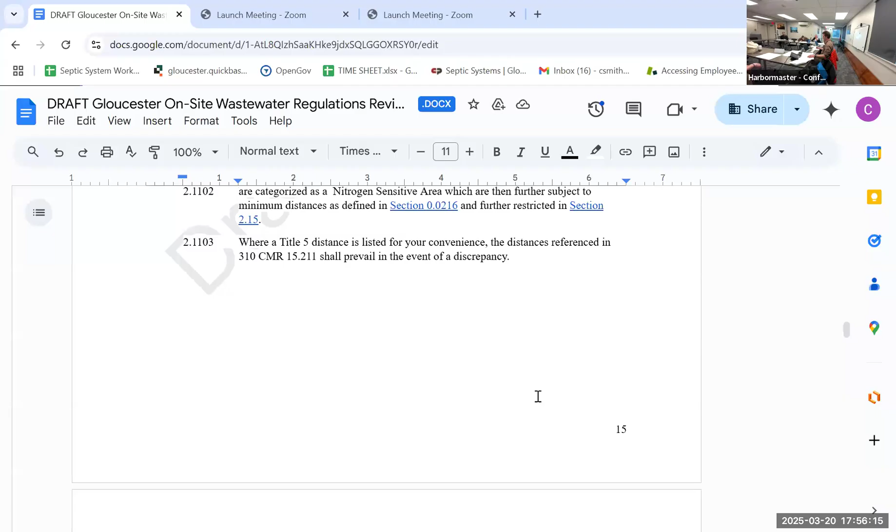The next one, minimum setbacks, which we've already covered for the ACEC, so I'm gonna skip over that. So the next one, I think it was a typo, and I just wanted to bring it to the board's attention to make sure. So clarification: the A and AE and land subject to coastal flooding. We talked about adding a vertical component to this, and we talked about 4 feet above flood elevation. The text says from the bottom of the soil absorption system. I think the text should say from, like, the ground surface.

Because if we say from the bottom of the soil absorption system, that means that somebody could build in a flood zone and just elevate the soil absorption system out of it. Whereas if it's from the ground surface, I think the intent of the vertical component was that we grant variances similar to what I said for Crescent Point, like, oh, the flood elevation is 13, but the top of this system is at 27, so it's, you know, so many feet above it.

My question to you guys, and I'm the one who brought this up, not a designer, is shouldn't this be from ground surface instead of the bottom of the soil absorption system? Or do we intend for it to be the bottom of the soil absorption system? Yeah, I thought it was the bottom of the soil absorption system because of the still water elevation from the flood, you want to keep it out of the septic system. Correct. I agree with that, yeah.

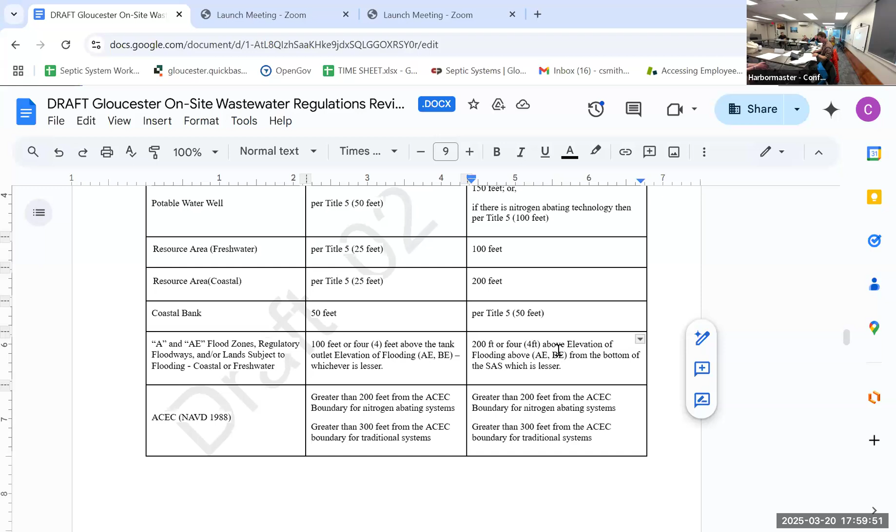And it's not easy to permit a septic system in BLSF. That's a pretty hard thing to do for conservation. Oh, is it hard with conservation to permit? Yeah, you have to offset any fill that you bring in, so if you build a huge mound system, you're digging a big hole someplace else. And it's gotta be at the same elevations, so, yeah, it's complicated. Okay, love it.